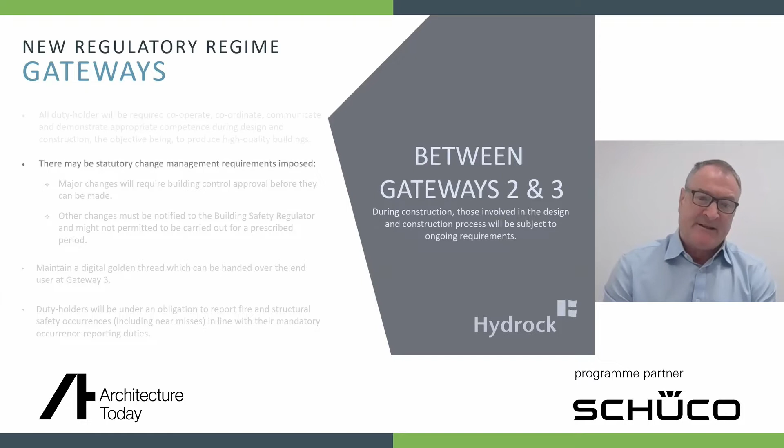And there may be statutory change management requirements imposed. This is obviously to ensure that the impact of proposed changes is thoroughly considered, with proportionate regulatory oversight. The approach to categorising major and notifiable changes will be set out in secondary regulation, and this is subject to the consultations I previously spoke about.

Once the bill, now the bill has gained royal assent, major changes will require building control approval before they can be made. What constitutes major changes is subject to the results of the consultations being undertaken, and serious designs could amount to a hard stop.

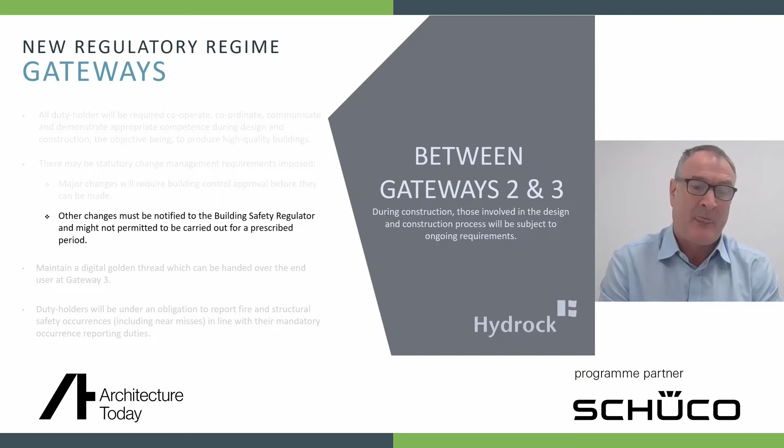So significant changes will have to go through the approvals process, and this could in worst cases put a halt to construction. But hopefully that doesn't happen and change is managed appropriately through the construction phase.

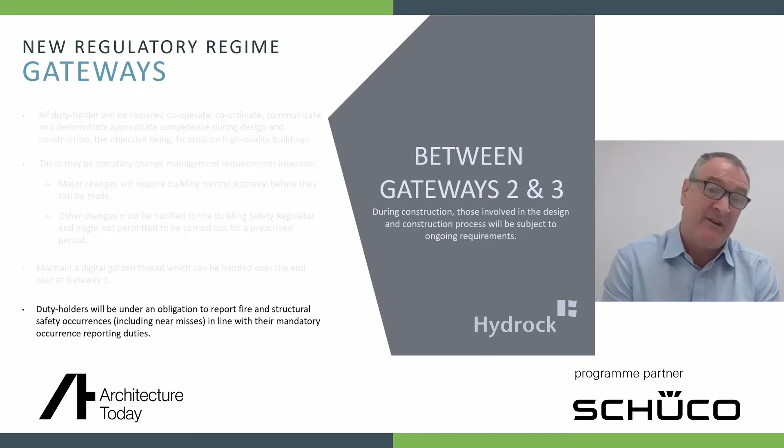And we'll be obliged now to maintain a digital golden thread, which can be handed over at the end to the end user at Gateway 3. And finally, duty holders will be under an obligation to report fire and structural safety occurrences, including all near misses, in line with their mandatory occurrence reporting duties.

So finally, Gateway 3. This will be another hard stop where building control approval must be obtained from the Building Safety Regulator before commencing occupation of high-risk buildings. And registration of the building and certification will be required.

Gateway 3 applications must demonstrate how the building work complies with building regulation requirements to provide assurance that buildings are safe to occupy. Simply put: have you built the building you were given permission to build at Gateway 2? That's the question the building safety regulator will be asking. The application will need to include plans and documents that reflect the as-built building, forming part of the digital golden thread of building information.

The information must also be handed over to the end user, the building owner, which will help them manage building safety risks when the building is in use, by ensuring they have accurate, good quality and up-to-date information on the building.

This approach is meant to deliver a culture change, so that building regulations compliance and building safety is considered throughout the design and construction phase, rather than late in the process when mitigation measures may be needed.

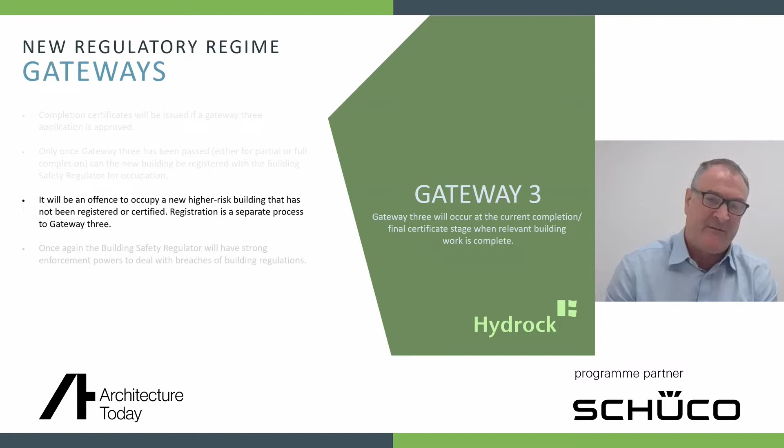It will be an offence under the new Building Safety Act to occupy a higher risk building that has not been registered or certified. So registration is a separate process to the Gateway 3 approval. And once again, the Building Safety Regulator will have strong enforcement powers to deal with breaches of building regulations.

During construction, significant design change could create a hard stop situation. And at Gateway 3, the Building Safety Regulator requires to be satisfied that the building is that which was given permission to be built. Then finally, in occupation, the Building Safety Regulator is satisfied that the building meets the required structural and fire safety requirements. Only then can the building be occupied.

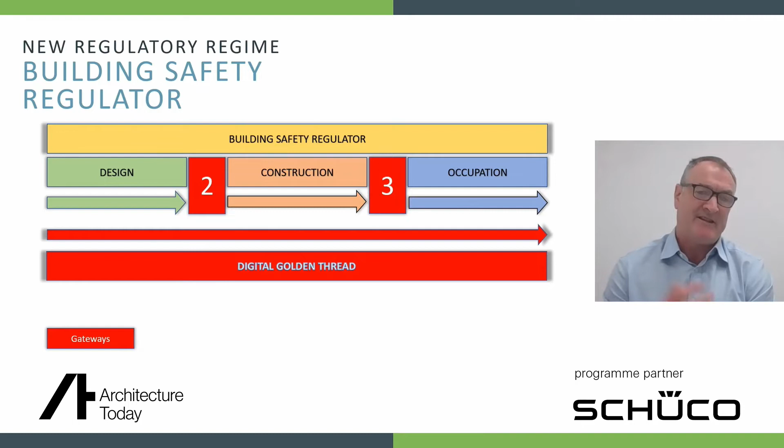Finally, we've got to consider the digital golden thread, which will be required from design to demolition. We need to consider how we're doing that, but that's a discussion for another day. So just to finish the presentation, a slight summary and discussion.

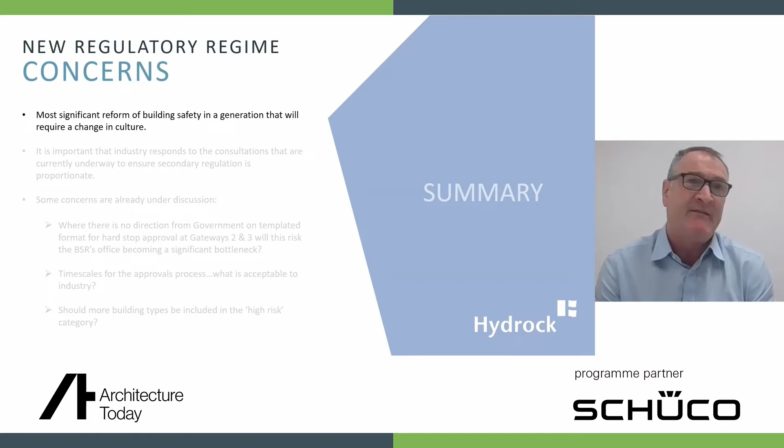This is the most significant reform of building safety in a generation. It's important that we as an industry respond to the consultations that are underway. We need to make sure that the regulation is proportionate and workable.

But some concerns have already been raised. For instance, there's no direction from government on a templated format for hard stop approval at Gateways 2 and 3. Will this risk the Building Safety Regulator's office becoming a significant bottleneck, delaying projects? So timescales for the approvals process need to be decided.

So what's acceptable to industry? This is another reason why we should get involved in the consultations that are underway.

And finally, should more building types be included in the high risk category? What about residential low-rise? Should those be included? These are the types of things that are up for grabs, and the types of information that government are keen to hear from the consultations. So we really hope that you get involved.

So hopefully you enjoyed the presentation. Apologies, the presentation is obviously about regulation, and that can be a very dry subject, but hopefully there were some parts of the presentation that you found to be of interest. So thank you for listening, and we will welcome any questions.

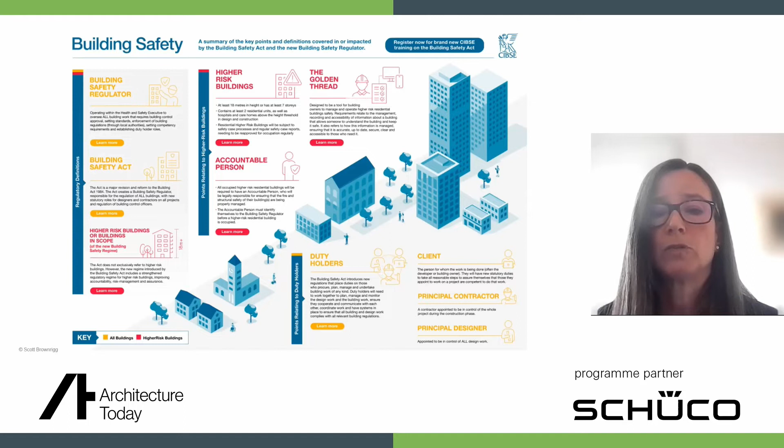The critical driver is the instituting of culture change and motivating compliance with regulations in the construction industry, to address those significant failings found by Dame Judith in her report. This infogram from CIBSE makes clear the parts that are applicable to all buildings and those only for higher risk buildings. What people haven't always been clear about is that the changes to the regulations are to all building types, not just to higher risk buildings.

The building safety reforms introduce a new regulatory framework for higher-risk buildings. These include the creation of the Building Safety Regulator to become the Building Control Authority for higher-risk buildings, hard stop decision points during design and construction, the reduction of fire and safety risks related to fire spread and structural failure through greater planning and regulatory scrutiny, increased regulation of professional competence—including building control inspectors and building control authorities—and the introduction of competency standards for all construction professionals for all construction projects, through their professional and trade organisations.

There are going to be new statutory roles during the design and construction of all building types, and a new statutory management role for the building owner during occupation. This has previously been discussed as being the building safety manager, but this title and role has now been removed, leaving only the management requirements. There's going to be a requirement for the golden thread of building information for higher risk buildings, but the principles of this are good practice and could lead to better best practice for other building types as well. There will also be registers of building inspectors and building control approvers for higher risk buildings, and the new building safety regulator will be the Building Control Authority for higher risk buildings.

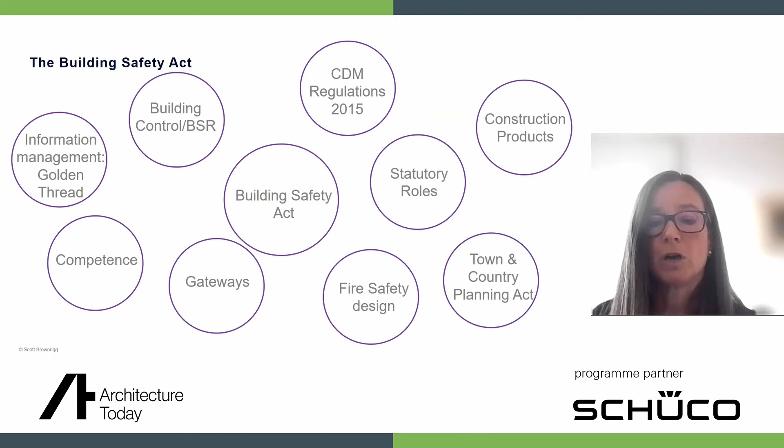To have more transparency of fire and structural safety strategies, the new regulatory regime for HRBs is being introduced. These regulations will require building owners to demonstrate safety, both structural and fire, at each of 3 new gateway points: for planning and design, for construction, and for occupation of the HRBs.

At Planning Gateway 1, a fire statement is going to be required. This is, and is actually already, an online application with defined questions, including the number of words required for responses. It has to be submitted by a fire engineer. This is currently in place through the town planning process.

The building control application will be known as Gateway 2, and the building safety regulator is given 12 weeks to make this approval. They are asking that 2 weeks prior to the approval being made, they are notified so that they can put a team in place to start the consultations. This is going to be the equivalent of the old full plans application and will take place at the end of RIBA stage 4. The building safety regulator is setting out what sort of plans, drawings and new prescribed documents they will want to see with that building control application. It is going to be quite different from what has been done before.

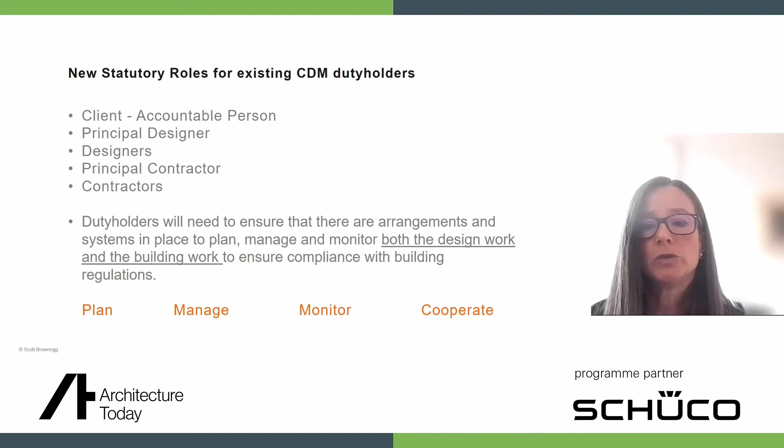So the duty holders will keep their existing duties under the CDM regulations, but will also have requirements to make sure that the building regulations are complied with under this legislation. It will require two separate appointments in your roles. That includes cooperating with all the other duty holders, communicating and sharing information, coordinating and putting systems in place to plan and manage work, and ensuring competence - appointing people with the right skills, knowledge, experience and behaviours for the work they need to do. You will see that there's very similar language used in the CDM regulations.

The duty holder for ensuring that the design is compliant with the building regulations is the principal designer. That principal designer appointed has to be in control of all the design work, and it is understood that would be the lead designer of the project. They need to plan, manage and monitor that design work, ensuring that the design, if built, will comply with all the building regulations. They have to ensure that they and the designers in the team cooperate, communicate and coordinate their work with all the other duty holders, and they will liaise with the principal contractor when appointed, sharing all relevant information so the contractor can build it safely.

Every project is going to have a designated individual for that principal designer role if this role is appointed to an organisation. It is expected that this role will be given to an organisation because it is so wide-ranging, but one person within that organisation will be the contact person for these regulations, the CDM Building Safety Act.

These new liabilities and technical challenges are going to require architects and design leaders to upskill themselves, to be certified and develop the right competencies.

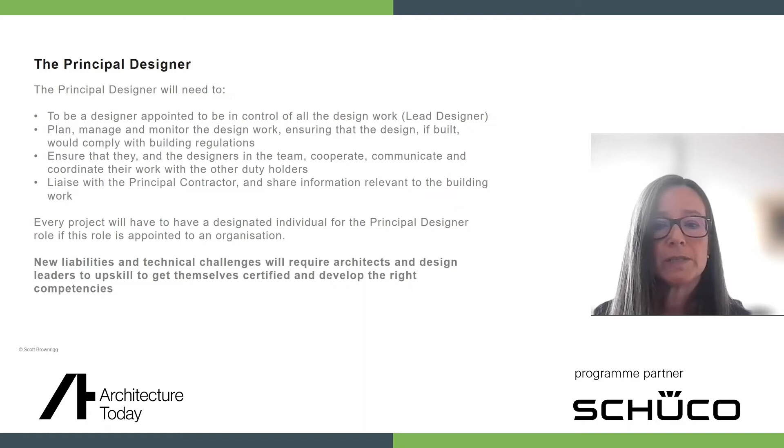On technical competencies, the government have worked with the BSI to produce PAS standards for competence frameworks for principal designers, principal contractors, and for the management of safety in residential buildings. For us on the design and construction side, we need to be cognizant of the principal designers and the principal contractors. This Act places a duty of competence on anyone carrying out design or building work to have the relevant skills, knowledge, experience and behaviours for that role. So what's happening at the moment is that the professional institutes and trade organisations are now working to produce outcomes-based training and skills requirements to map to the requirements of these PASs.

On project management, the RIBA plan of work - generally we have always been working to the RIBA plan of work 2020, and a new one was released quite recently. The fire strategy and the health and safety strategies are already included in the timeline of activities. However, going forward, we will need to map this onto the design and submission requirements from the Building Safety Act, and manage the mapping of the safety and fire risks onto this plan of work. This is for all buildings and not just for HRBs.

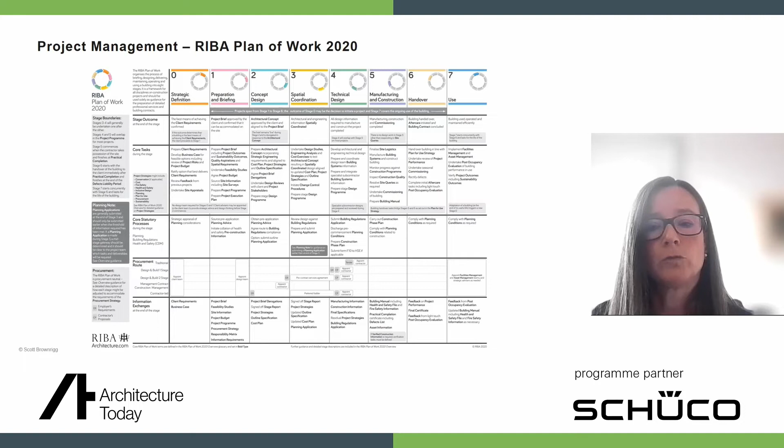We will need to make sure that the fire engineer is appointed early enough in the process to collate and submit the fire statement for planning. This allows for the integration of the fire safety requirements and strategy into the planning documentation, and the planning departments then consult with the building safety regulator for that particular statement. You are not allowed to deviate from that strategy while you progress during the workings for Gateway 2 - so, the golden thread of information.

This is material applicable to the building for all its activities and construction, to be building information that is identified, stored and updated throughout the building's life cycle. This golden thread of information requires very clear lines of responsibility to be drawn up. The government have produced ideas about how this will be done, wanting responsibility matrices for the design stage by the design team, for the delivery stage by the contractor, and for occupation by the building owner.

There's a considerable level of detail within the Building Safety Act and new regulations we need to be aware of, covering communication and coordination around design risk management and design project management. Records must be kept of all products specified and constructed on your building. All products now have to be certified for construction use by the new Construction Products Regulator - if they haven't got that certification, we're not allowed to use it on the building going forward.

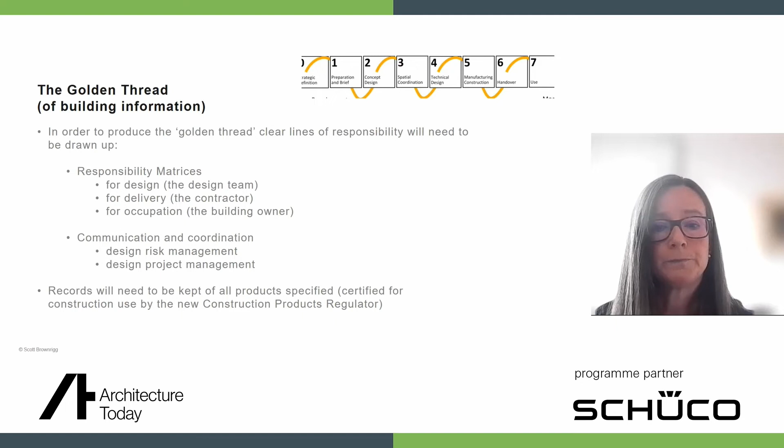Fire safety documentation - there is a lot of it, so please make sure you have all your documentation in order. Regulation 38 of ADB requires fire safety information to be given to the responsible person - that already exists. However, there's now a requirement for the fire and emergency file for higher risk buildings, which is also part of your Gateway 2 application. Because of this requirement for higher risk buildings, Regulation 38 no longer applies to them. Of course, we already have the requirement to provide the health and safety file to the client or accountable person at the end of the project, which includes the fire safety strategy.

I wanted to touch on what the occupier has to do for the building. For a higher risk building only, they have to produce a building safety risk assessment, a safety case, and a safety case report, setting out fire and structural safety information, to register their building with the building safety regulator, likely in April 2023. Once they have all that information together, they issue it to the building safety regulator, who identifies the building's major fire and structural hazards and how they are being managed and controlled, to reassure occupiers and residents of higher risk buildings about fire safety measures.

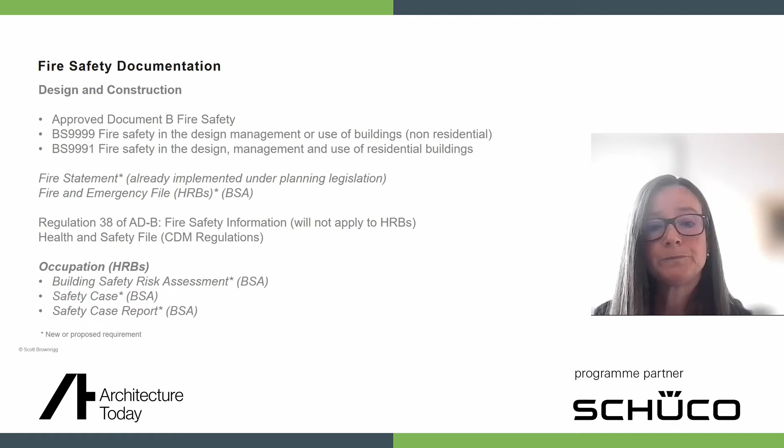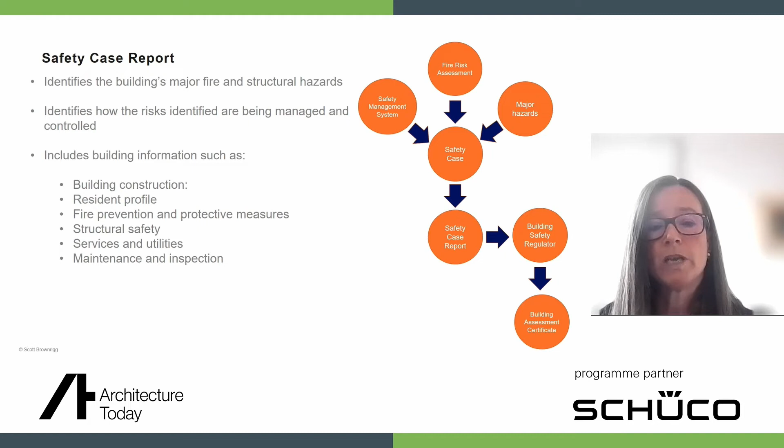So this is the safety case report. It includes the building's major fire and structural hazards and how they are identified, along with building information such as construction, facade material, insulation material, wall attachment type, roofing, compartmentation, means of access and escape, resident profile, fire prevention and protective measures, structural safety, services and utilities, and maintenance and inspection. All that material comes from our golden thread of information provided through the design and construction process.

So what does this mean for us in design and construction? It's going to be an improved way of working, with communication and coordination - the golden thread being the overarching wording for that. There will be new single points of responsibility defined as new roles for delivering building safety, requiring a change in organisation and industry attitudes around design team appointments, possibly procurement methods, and definitely change control.

Competency will have to be clearer and proved to the client at the beginning of the project - ensuring you've got the right people doing the right work at the right time. There's going to be lots more training and learning, and it will take a couple of years to bed in these new requirements as more information becomes available. Record keeping by every person in this process will need to be upskilled, whether digital, online, web-based or cloud-based, and that will also tie into project management. Basically, the Building Safety Act is going to be legislating the process of designing, procuring, building, and managing your building.

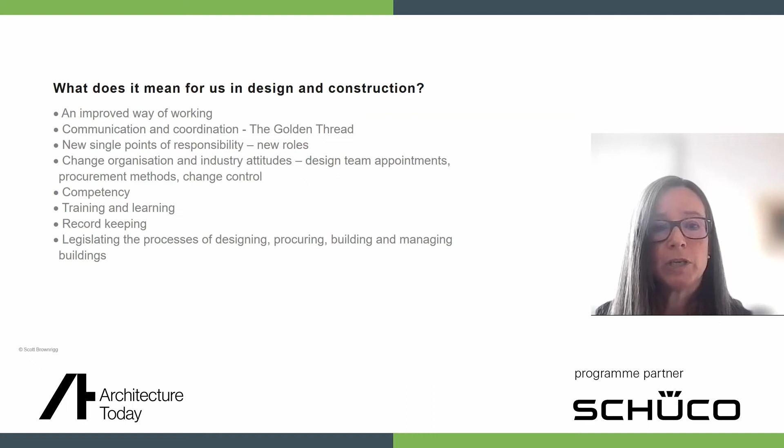We have time now for a couple of questions. Is this only relevant to high-risk buildings? I know you said at one point that these changes will affect all buildings. Can you tell us which elements will be relevant to non-high-risk buildings?

Yeah, there's been a lot of focus on HRBs and what the difference is going to be, naturally because of Grenfell. What's going to change for the whole system, for everybody, is identifying that the gateway system and the golden thread are not applicable to all other buildings outside that classification. They are only part of the regulations that are for higher risk buildings only.

What it does apply to for all buildings, though, is remembering that the application of duty holders is for all buildings, not just higher risk buildings. People will be familiar with that setup because it's come through from the CDM regulations, which Dame Judith had a lot of regard for.

The other interesting point is that non-HRB clients will be able to choose their building control organisation, which everybody can do at the moment. Going forward though, HRB clients will only be able to use the services of the building safety regulator. That choice won't be there, but other clients will be able to choose their building control organisation.

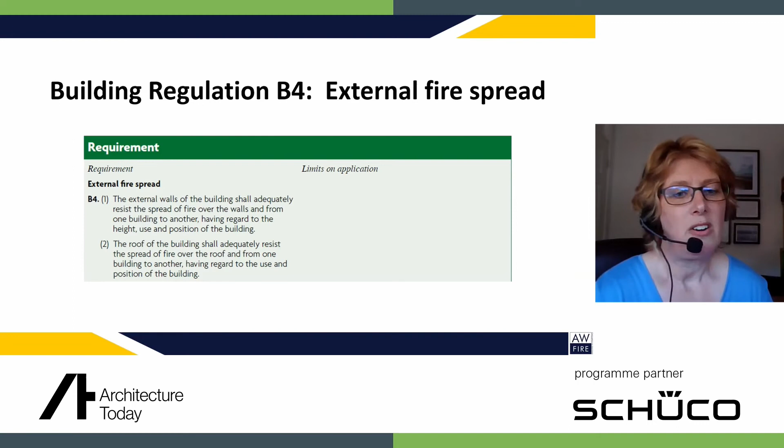Now, Approved Document B gives us a little bit more information. It says that the external walls of a building should not provide a medium for fire spread if that is likely to be a risk to health and safety. But there are now a number of other aspects that I want to consider.

Firstly, we have fire safety legislation for occupied buildings, in the form of the Regulatory Reform Fire Safety Order. That requires that the responsible person undertakes a suitable and sufficient risk assessment in relation to fire and life safety. Earlier this year, the Fire Safety Act was enacted, and that clarified that the building structure and its external walls need to be considered as part of that fire risk assessment.

It also spelt out that attachments to external walls, so things like solar PV panels, brise soleil, balconies, they also need to be considered as part of that fire risk assessment.

Now, this brings some challenges to the fire risk assessment industry that I've been part of for nearly two decades, because most fire risk assessors are not competent to assess construction materials that make up the building. Construction materials and methodologies is a subject that hasn't really formed part of most fire risk assessment courses for roughly the last 20 years. There are also some real difficulties for fire safety professionals being able to get insurance to assess external walls, which I'm sure architects are well aware of.

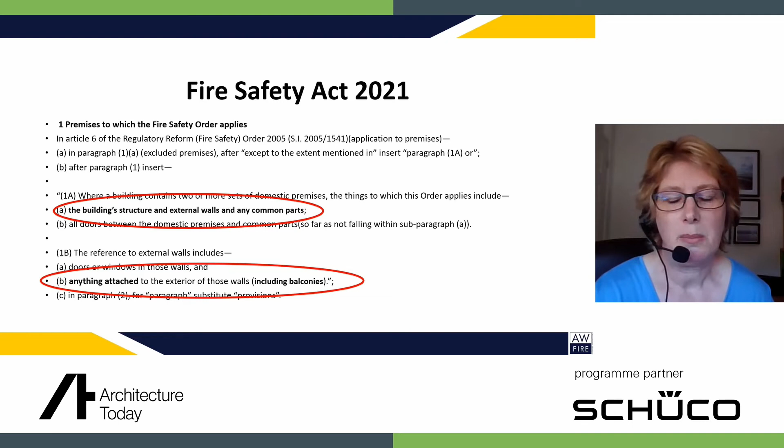So it's likely that these aspects will have to form a separate annex to the fire risk assessment and will be done by a relatively small number of firms and individuals.

Separately to fire safety legislation, we also have mortgage lenders who are looking for reassurances around external walls from a risk perspective. And from that standpoint, the RICS devised the EWS1 form. Now, this rates the primary materials used in the external walls of a residential block of flats as either being of limited combustibility or not of limited combustibility. And then there's a subset rating as to whether remediation works are required or not required.

Now, those signing those EWS1 forms have to have specific qualifications and memberships that are stipulated. And I'm told that there are around 100 of us signing those forms at the moment, which obviously is not a huge number. For someone looking for a mortgage on one of those flats, these forms still largely remain a requirement, and different lenders have differing stances depending on the rating given on the form.

Only limited lenders will lend on a B2 rating, for example, and a B2 relates to buildings where there is combustible materials in the external walls and remedial works have been deemed to be required based on the findings of that external wall assessment.

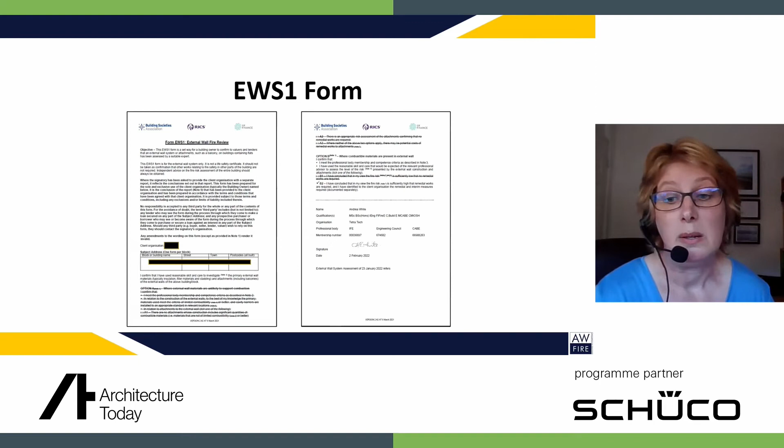Now, earlier this year in April, the Building Safety Act received royal assent, and the bulk of the new obligations under that Act will come into force within the next year or 18 months. I thought for this presentation, I'd just pick out a couple of aspects of the Act which are relevant to external walls.

Now, one aspect is that the Building Safety Act will now allow increased access to redress through the Defective Premises Act and Section 38 of the Building Act. And that's actually been in place now since the 28th of June 2022.

It will also widen the scope of the '72 Act and bring into force Section 38, which gives private individuals the right to bring a claim for compensation for physical damage as a consequence of a breach of a duty imposed by building regulations. Now, the Act will also extend limitation periods for claims.

Those relating to a dwelling, it'll extend from 6 to 15 years, except for claims arising prior to the commencement of the Act, and those will have a limitation period of 30 years. So there's some really quite substantial changes that have been brought in as a result of the Building Safety Act being enacted.

Now, in terms of civil litigation around external walls, this is a very recent court case, and the finding was that a specialist housing contractor, Mulalley, had breached its contract in both its specification of cladding and its installation of that system, which was found to be defective. The potential bill is over £8 million in damages for both the remedial works undertaken to fix the defects and also the cost of the waking watch implemented as an interim measure. So we can see that this case could potentially have huge ramifications over who pays to rectify cladding deemed to be faulty, and it really highlights the extent of the potential claims.

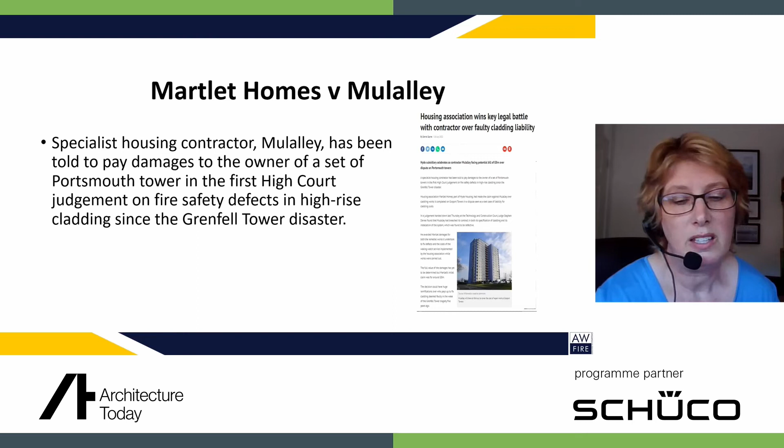So I've tried to show there's been a substantial increase in the mechanisms through which external walls need to be considered, and also the ways in which redress can be sought. What I want to do now is briefly look at how we assess external walls.

PAS 9980 is a new guidance document that was recently published. It gives professionals a methodology to use when assessing external walls, and it uses 3 risk factors considered as part of that assessment. Firstly, fire performance - this looks at what materials make up the external walls, how combustible they are, and the presence and standard of cavity barriers.

The second risk factor is facade configuration - how are the materials set out across those external walls? Are there small sections of combustible cladding amongst large areas of non-combustible materials, for example? Is the insulation combustible or non-combustible? Do we have stacked balconies running up the building, or are they set out far apart from each other and disparate? Then the third risk factor is fire strategy and fire hazards.

So what is access like to the building? Can you firefight on all elevations of the building? Or is it perhaps built along a canal or a river, for example? Is there a car park underneath the building? This risk factor covers a number of associated aspects which are likely to affect ignition sources and affect firefighting.

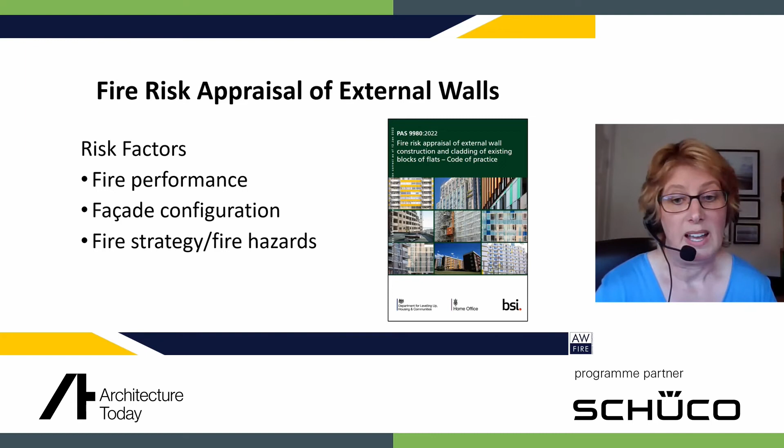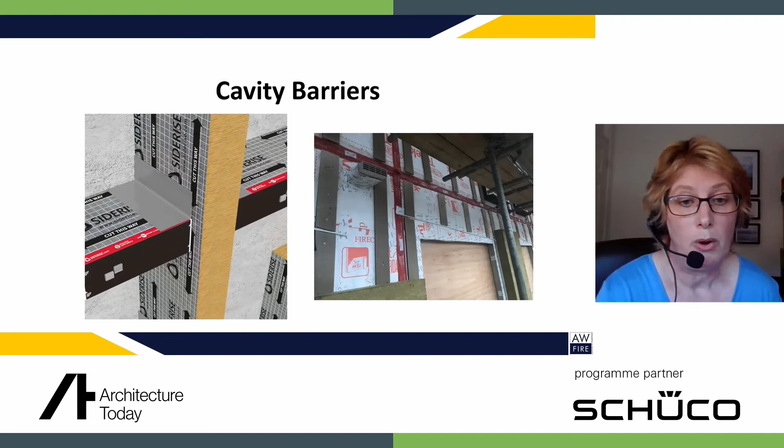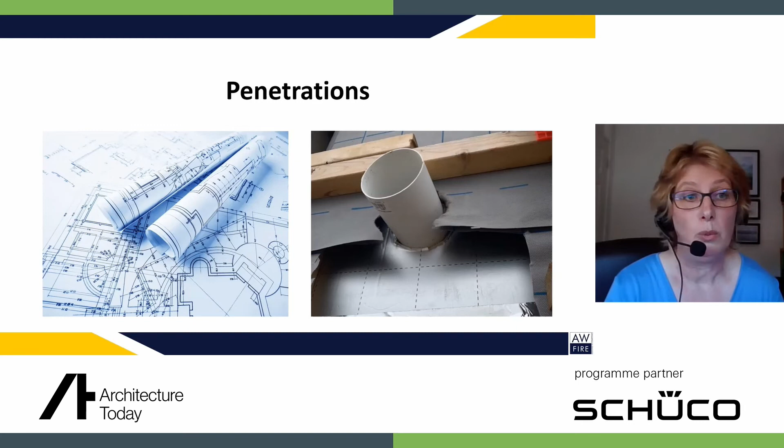This building received a B2 rating on its EWS1 form, and remedial works were required.

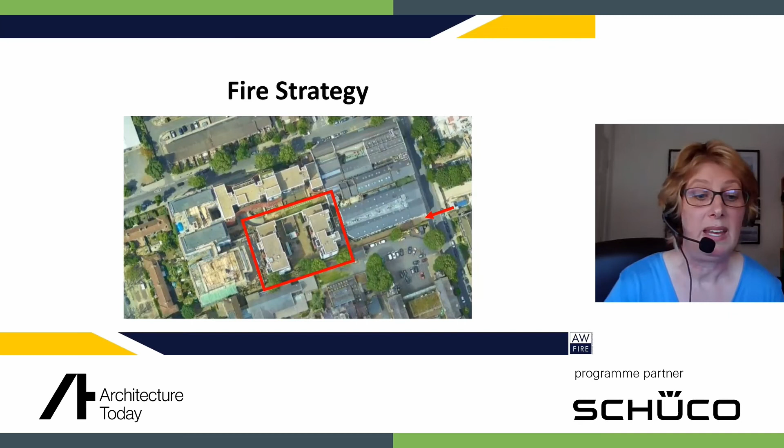So in conclusion, the theme of today is safety first. From my perspective as a fire engineer, I think we need to build safer by building together, by involving relevant professionals during early design stages. We've now got requirements for gateways for relevant buildings and for fire statements, which support this early intervention and wider involvement of professionals at earlier RIBA stages, and I support that fully.

I hope I've shown you the importance of having drawing details of aspects such as fire stopping and cavity barriers. My hope is that passive fire protection providers and fire engineers will have greater involvement during those early RIBA stages. I'd also like to see them brought in during construction to scrutinise changes to the build and to scrutinise workmanship during construction. For external walls, a lot of fire safety aspects just aren't visible in the completed building, and my view is that we need to make sure those are right during construction.